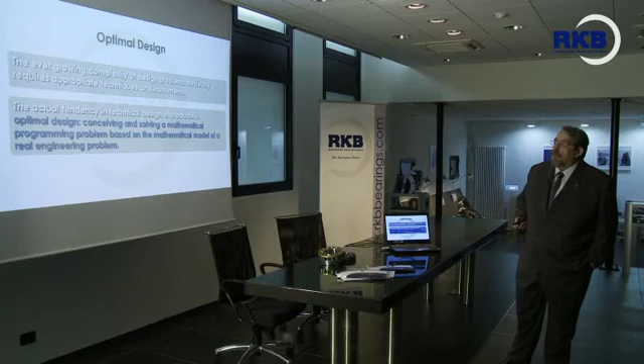The ever-growing complexity of design problems obviously requires appropriate techniques and instruments. The actual tendency in technical design of products is optimal design. That means conceiving and solving a mathematical programming problem based on the mathematical model of a real engineering problem.

In mathematics, mathematical programming refers to choosing the best element from some set of available alternatives. Often, this number of possible alternatives is infinite, or at least very large in computational time terms. It's worth noting here that the term mathematical programming is not directly related to computer programming.

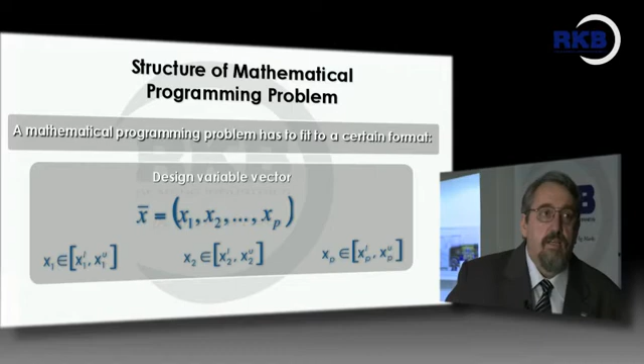The structure of a mathematical programming problem starts with the establishment of a so-called design variable vector. All the components of the variable vector are decision variables, and each of them has to lie in a certain range, a continuous or a discrete one. Then, we have to consider also an objective function and a set of constraints.

Solving this mathematical programming problem means to find the vector x so that the objective function reaches its global minimum or maximum and the constraints are all satisfied.

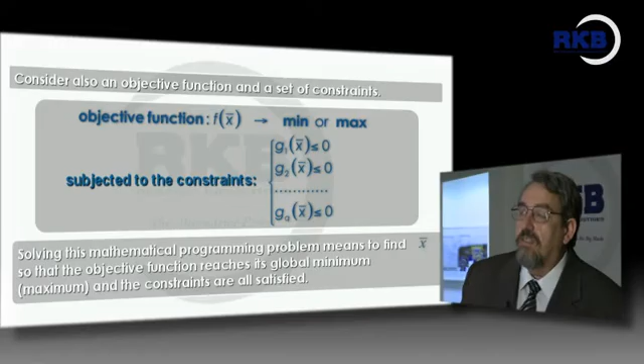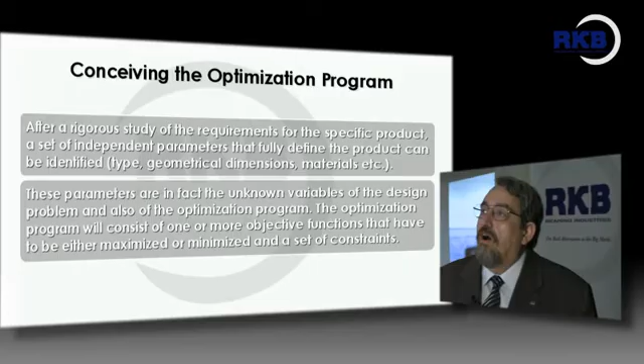After a rigorous study of the requirements for the specific product, a set of independent parameters that fully and uniquely define the product can be identified. That will be types, geometrical dimensions, materials, and so on. All these parameters are in fact the unknowns of the design problem and also of the optimization program.

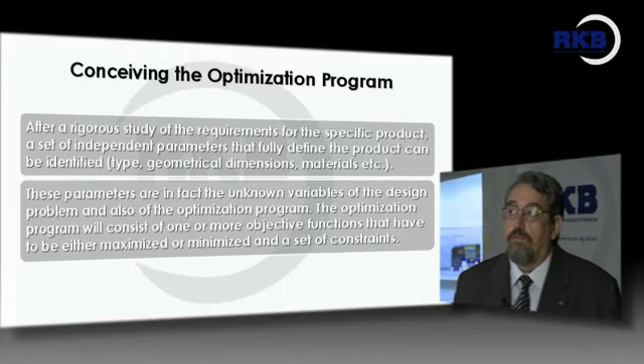The optimization program will consist of one or more objective functions that have to be either maximized or minimized and a set of constraints. At this point, two issues have to be solved. The first one, how many objective functions should be used? This first issue is closely connected to the specific optimal design problem. It's up to the designer to choose the appropriate approach.

The second one is which are the instruments or algorithms that should be used to solve the optimal design problem. RKB thinks that evolutionary algorithms are the answer to this question.

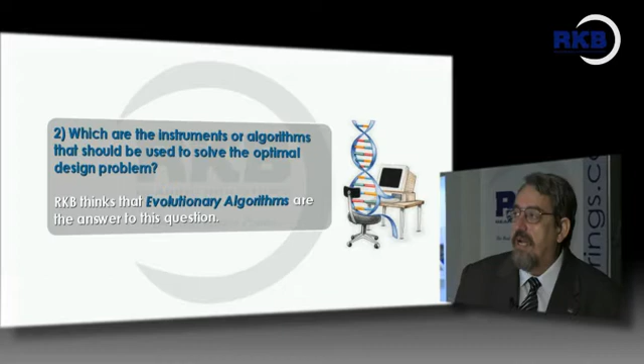An evolutionary algorithm is a subset of evolutionary computation, a generic population-based meta-heuristic optimization algorithm. An evolutionary algorithm uses some mechanisms inspired by biological evolution: reproduction, mutation, recombination, natural selection, survival of the fittest, and so on.

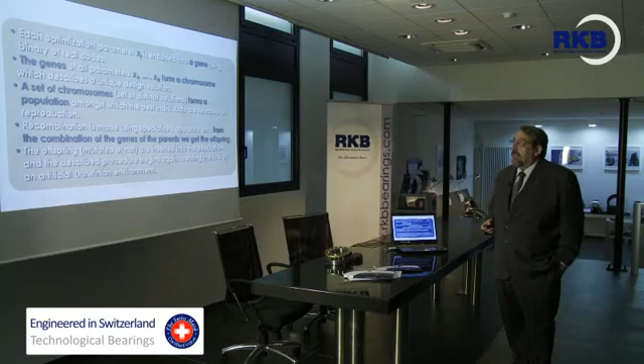Each optimization parameter, xi, is encoded to a gene using a binary or a real code. These genes, in fact the parameters x1 until xn, form a chromosome, sometimes called an individual, which describes a unique design solution. A set of chromosomes forms a population among which the best individuals are selected for reproduction.

The algorithm starts with a randomly created initial population, then the individuals are evaluated according to their objective function, and the population is ranked next according to the assignation of a fitness. In the ranked population, the individuals authorized to be parents are selected, and they form the so-called intermediary population.

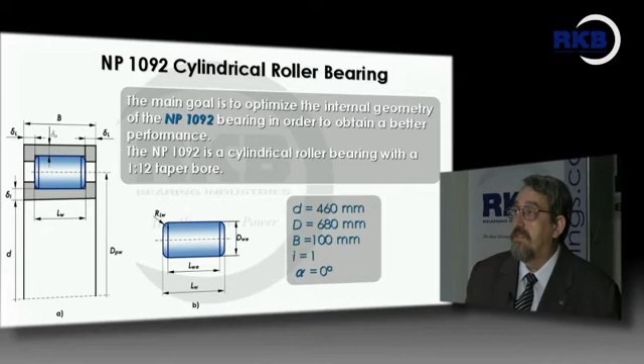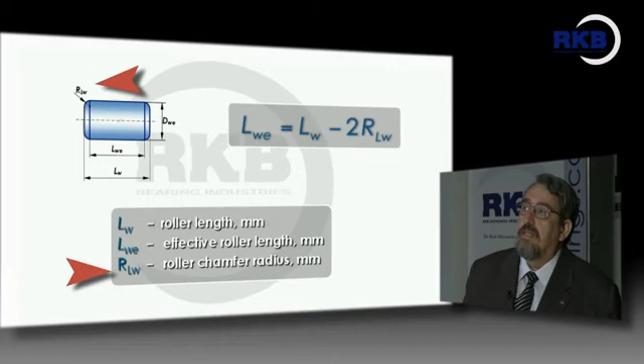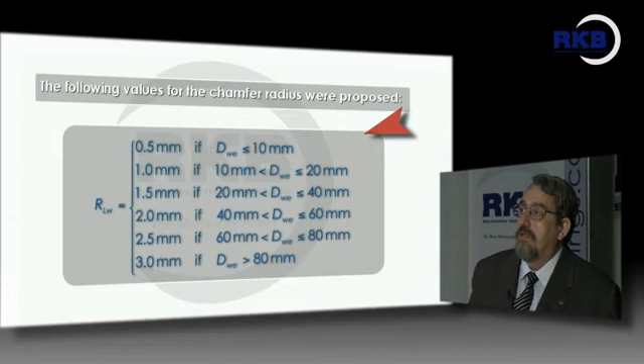A very important element of a bearing is the roller, and here we have a sketch of a roller in which we present the total length of the roller, the effective length of the roller, and the radius of the chamfer. RKB proposes this value for the radius of the chamfer according to diverse values of the diameter of the roller.

Another important value is the thickness of the cage tenon existing between 2 neighbor rollers. This thickness depends on the number of rollers, the effective diameter of the roller, and the pitch diameter of the bearing. We find an exact formula to calculate this thickness, and an approximate one with very good results. In the optimization that follows, we used the exact formula.

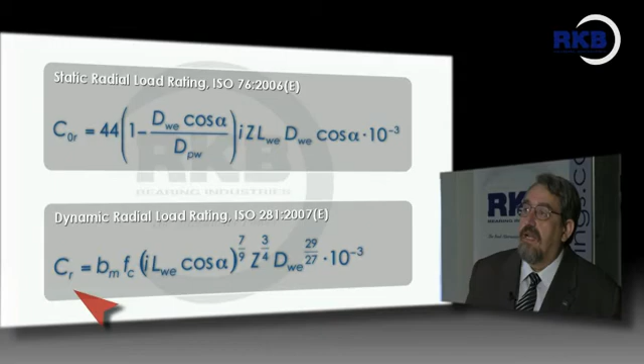Here we have 2, probably the most important parameters of a bearing, the static radial load rating and the dynamic load rating. In the optimization, first of all, we studied the geometry of the bearing and we identified 4 genes that are enough to describe fully and uniquely the design of the bearing. These genes, these variables, were the roller diameter, the roller length, the pitch diameter of the bearing, and the number of rollers. Here you have the range in which we can find a solution.

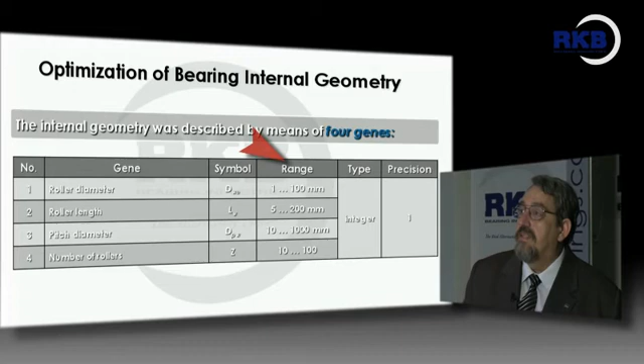The objective function was the basic dynamic radial load rating. Obviously, we intend to maximize this parameter. In order to perform the optimization, 5 constraints were identified. The first one is connected to the thickness of the outer ring that must be greater than a minimum value. This value was set at 26 millimeters according to our knowledge and experience. The second constraint was connected to the thickness of the inner ring, and this thickness should be greater than a minimum value, set at 28 millimeters.

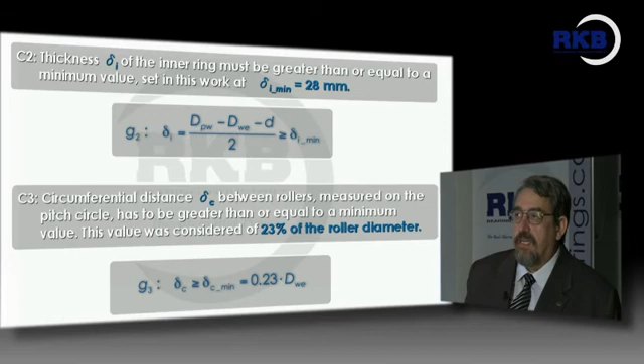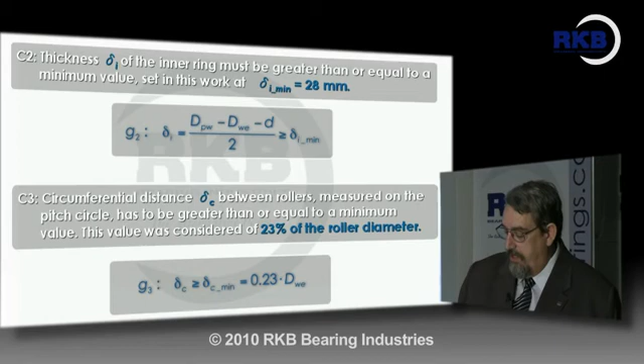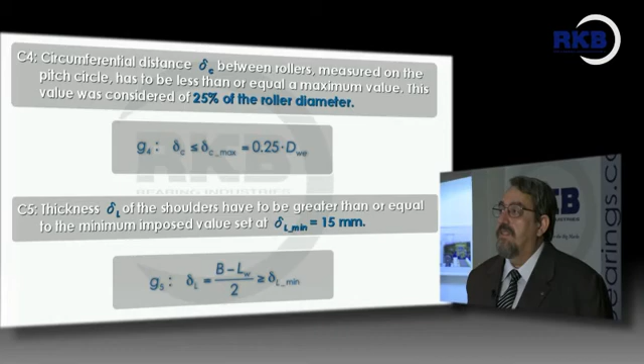The next 2 constraints are connected to the circumferential distance between the rollers that have to lie in the range of 23 to 25% of the roller diameter. And finally, the thickness of the shoulder has to be greater than 15 millimeters. Solving the programming problem means using some specialized software, and in order to solve the above optimization program, we used Cambrian software, a very new software based on a new 2-phase evolutionary algorithm.

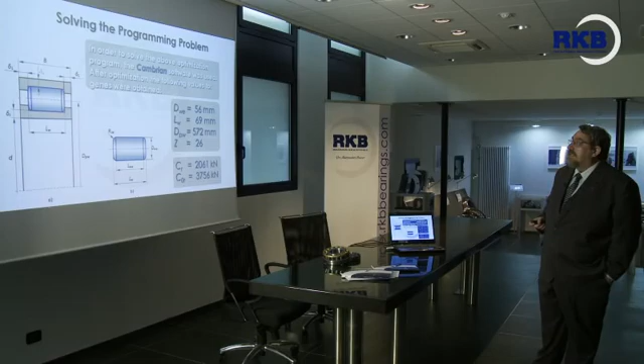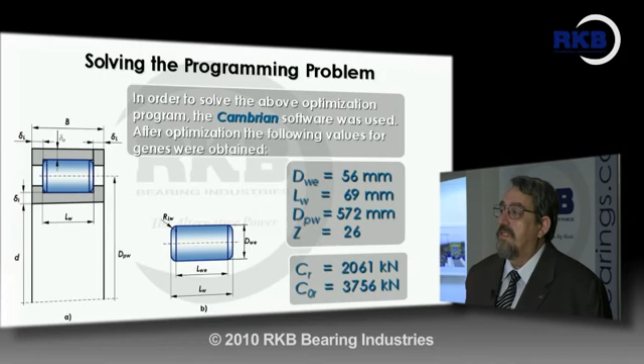After optimization, the following values for the genes were obtained. The diameter of the roller was found about 56 millimeters. The length of the roller was found at 69 millimeters. The pitch diameter was 572 millimeters, and the number of rollers was 26. The value of the objective function, that means the dynamic load rating of the bearing, was 2061 kilonewton. That means a very, very high value. For these values, we obtain even a large value for the static load rating, about 3,700 kilonewton.

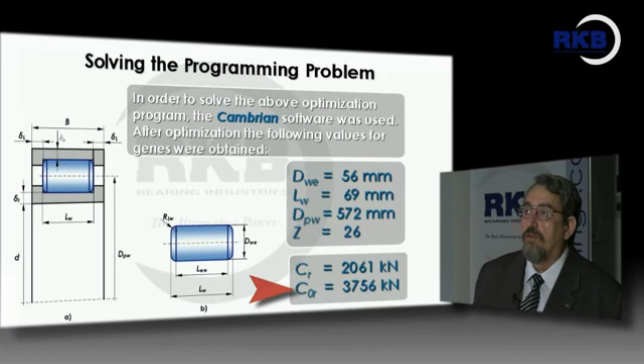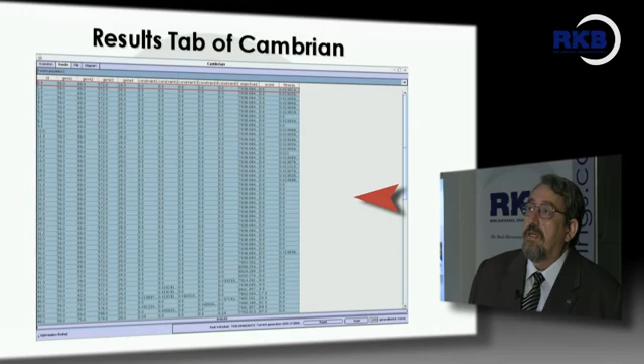Conclusion. We have shown that using the most modern, precise, and sophisticated methods in designing bearings, it is possible to find optimal solutions that correspond to remarkably large dynamic and static radial load ratings. In the future, the bearing internal geometry could be improved and the value of the basic radial dynamic load rating could be increased if the constraints are adapted to the new situation based on the gained experience and the technological advances reached both in material properties and machining technology.